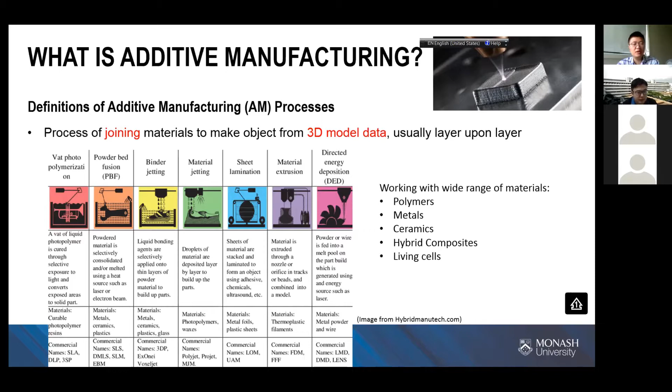Why does additive manufacturing bring us a lot of freedom? I want to emphasize two words in the definition. The first is joining. Because of this joining process, we build the part from bottom to up, so we can join material at different scales. Let me use the laser pointer on this slide.

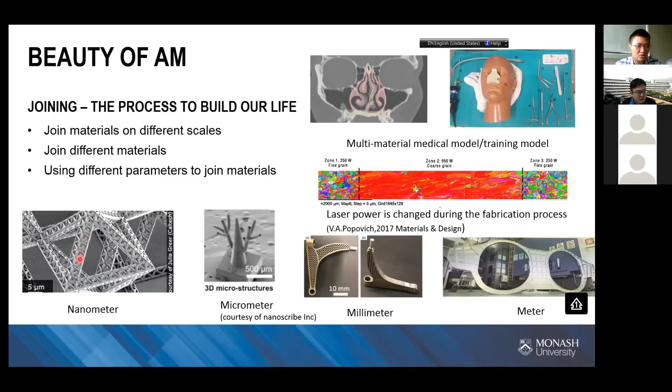If you can see here at the bottom of my slide, all these parts are fabricated by additive manufacturing, but on different scales. On the nanoscale, this is fabricated by the Nanoscribe, with the figure from Caltech. We can fabricate hierarchical lattice structures where the strut diameter is in nanometers, and each cell is about 5 microns in size.

On the micrometer scale, we can fabricate features to achieve certain surface properties. On the mesoscale or millimeter scale, we can have porous lattice structures to reduce weight. We can also fabricate parts at the meter scale, such as aircraft structure frames. By joining material, we can create different structures at different scales.

We can also combine different types of materials in one part. This is a demo from when I was studying at my university—I helped my supervisor guide an undergraduate student on their final year project to design a biomedical training model, to train medical students for nose surgery. Because the nose has different types of tissue with different elastic moduli, we used different materials in a single part to simulate the physical feeling of the medical training model. So we can join different materials.

Even with the same material, if we use different process parameters, we get different grain structures. In this example, researchers used different laser power to control the grain size. By controlling the grain size, we can achieve different mechanical properties in the fabricated material. So generally, by joining materials, additive manufacturing gives us a lot of design freedom for material process parameters.

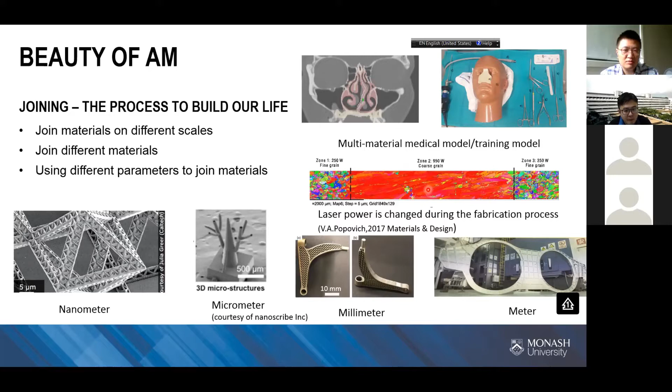Another beauty of additive manufacturing is that it can directly fabricate parts from digital or 3D model data, so it supports digital design and manufacturing. We can use CAD software to design complex structures.

For example, here are complex structures: on the micro scale, organic shapes, and on the meso scale, lattice structures. You can never imagine using conventional 2D hand drafting to draw these figures, or using conventional CNC machining or injection molding to make such complex structures. There's no way to do that.

Another thing is that only a digital model is needed. That's why additive manufacturing can respond quickly to any need. During the COVID pandemic, many countries lacked PPEs—personal protective equipment. Conventionally, we make PPEs based on injection molding, which is mass production.

But to do that, we need molds and dies first, and then we can manufacture—this takes 1 or 2 months for preparation. During the pandemic, we didn't have enough time for that. So you saw a lot of researchers and hobby makers use 3D printing to make PPEs, and it saved a lot of people's lives.

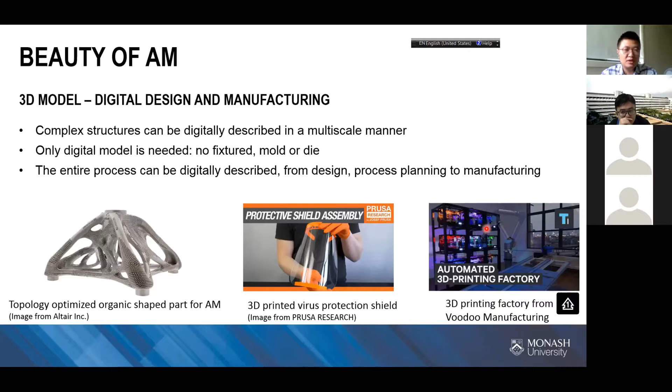In the next session, my talk will mainly focus on digital hybrid materials. Because of this beauty of additive manufacturing, we want to take use of that design freedom. One possible way is to design digital hybrid materials. So you may ask, what is a digital hybrid material?

First, we'll go to the concept of digital material, then the concept of hybrid materials. Some of you may be familiar with hybrid materials since it's a classical definition proposed by Mike Ashby: a hybrid material combines the properties of two monolithic materials, or one material and space. Technically, we have 5 different types of engineering materials: metals, polymers, elastomers, glasses, and ceramics.

We can combine any of them, and then we get a new type of material called hybrid materials. There are several types of hybrid materials.

Generally, why do we need hybrid materials? For example, we have a material with property P1 in M2, and property P2 in M1. For the hybrid material, we want to achieve material properties in between them. So we combine the materials with different microstructures, and then we can achieve different points.

Unfortunately, we cannot achieve all the points in this bounding box. We can mostly achieve along the boundary. We can only achieve points D, C, B, but ideally we want to achieve A, a material with both properties from M1 and M2. So this is the hybrid materials - almost like natural materials, which are hybrid.

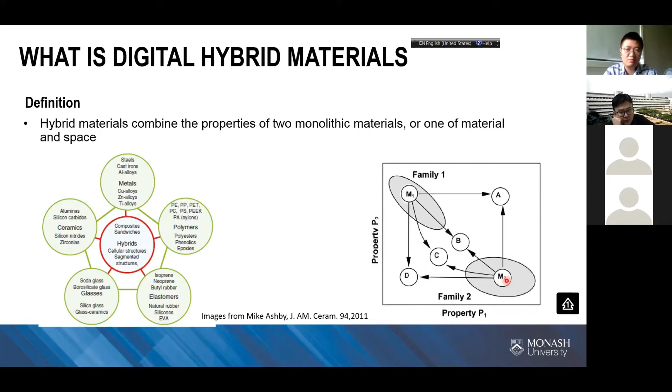The next topic is digital hybrid materials. I add the adjective 'digital' here. Why do we call it digital? Because a digital hybrid material is a type of hybrid material whose micro or mesoscale structure can be digitally designed and fabricated. Additive manufacturing is a digital manufacturing process, and it can help us digitally control the meso or microstructure of the materials.

Using computer-aided design tools, we can control the microstructure or mesostructure of digital materials. Here I show two different types of porous materials, which can be considered hybrid materials. One is metal foam, the other is an additive manufacturing fabricated lattice structure. The only difference is that in this group, we can consider it a digital material since its micro or mesoscale structures are digitally designed and fabricated.

We can control them - even though this one is randomized, like the foam structure, we can control the porosity distribution, the size of the pores, and also the strut thickness. That's the reason we call this a digital material.

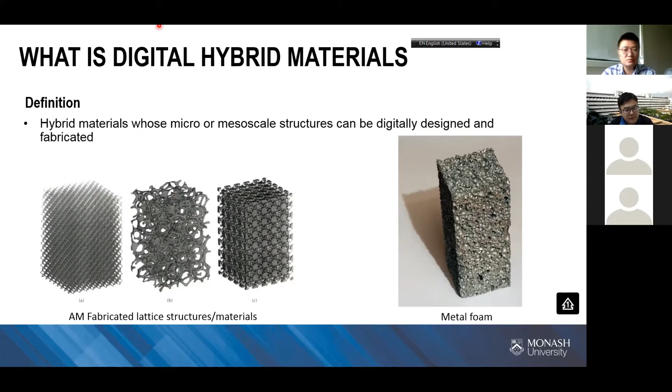In the next several slides, I'll give you some classification of existing digital materials. The first big type is called lattice or porous material. You can think of lattice or porous material as a combination of air and solid metals or polymers. According to the order of the material, we can divide them into two groups.

The ordered lattice material, where unit cells are periodically distributed in three-dimensional design space. We also have stochastic porous materials, like this type of foam, where cells are not periodically distributed - the size of the cells, the shape, and the strut diameters are randomly distributed. But we can also control the randomization, and the cell size can follow a certain probability density distribution. So this is a stochastic porous material.

For the ordered lattice material, we can also divide them into two types. One is strut-based - to describe this type of microstructure, we can use the cell topology plus strut thickness, the thickness of each strut. And also we have the surface-based TPMS, which is a gyroid lattice structure.

For this type of surface-based porous material, instead of using topology and strut thickness, we can use an implicit function, which is a surface function describing these materials, and we can define the implicit function to describe this type of material. This is about surface-based porous lattice materials.

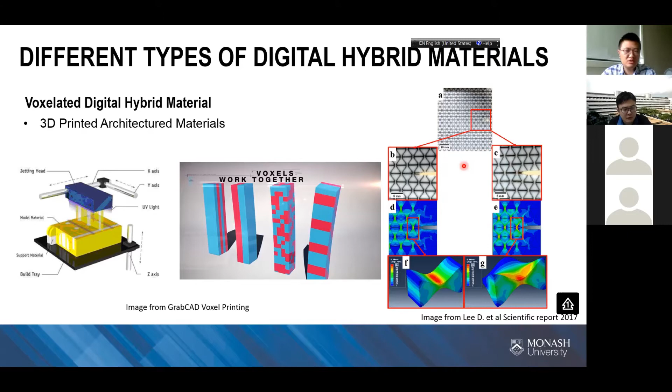Another type of digital hybrid material is a composite - a fiber reinforced composite. It's very conventional, but why do we call it digital and why do we use additive manufacturing to fabricate it? Because fiber reinforced composites have already been widely used in aerospace and other industries, but what unique properties or freedom does additive manufacturing bring us?

The first thing is that, compared to the conventional fiber reinforced composite fabrication process, additive manufacturing can help us fabricate parts with really complex shapes on a macro scale.

Second, we can control the volume fraction of the fibers, and also control the fiber orientation. Conventionally, if you're familiar with fiber reinforced composite fabrication, each layer can only have a uniform fiber orientation - 0, 90, 45 degrees. So we can only have certain angles, with all fibers oriented in certain angles, and everywhere we have the same fiber volume fraction.

But for additive manufacturing, because we have more freedom, we can digitally control the fabrication process using the toolpath. We can achieve different fiber orientations in the structures, which can further improve the mechanical performance of the designed part. I will show you another example later in my slides of how to achieve this type of design.

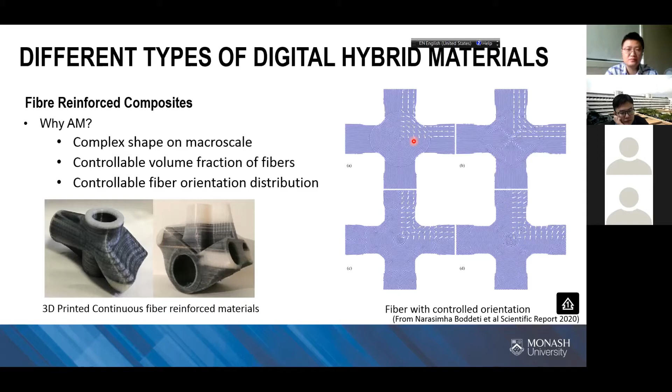The last type of digital hybrid material I call hierarchical digital hybrid material. In the past few slides, I showed you different types of digital hybrid materials, but we can combine them on different scales. This research has been done by Grace, who did a really great job trying to simulate and do the biomimetic design of the nacre, achieving this type of hierarchical structure to increase the impact resistance for digital composites and digital hybrid materials.

We can combine complexity on different scales, meaning that a digital material can be designed within another digital material. So we can have hierarchical structures. This gives us more freedom to improve or explore the properties of the designed digital materials.

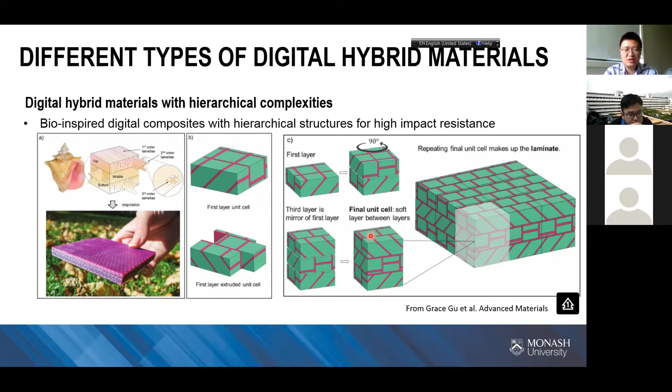So this is a quick introduction about what digital hybrid materials are and why we need them. The next part is about my research - from my PhD to my current research, trying to use computational driven methods to design digital hybrid materials fabricated by additive manufacturing processes.

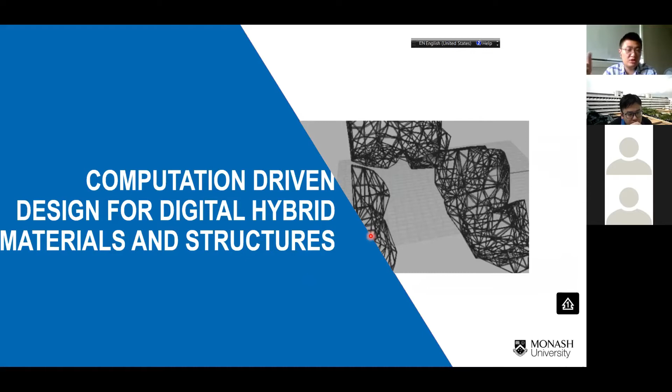First, I'll introduce you to another really important concept: what is computational design? There's no uniform definition of computational design hybrid materials - no expert has given a really strict definition of what computational design is. This definition is given by myself, from my own understanding.

In order to help you have a better understanding of what computational design is, I want to make a comparison between the conventional design method and the computational design method. Conventionally, I think most of you have experience using CAD software to design parts.

So we have the human, the operator, in front of the computer, like us today. We use the computer with some CAD software, and we use our hand to track the features, define the size, and so on. Even though we could work 24 hours a day, 7 days a week, it takes a long time to do the design, and we only have limited design options. We cannot explore all the design space.

But for computational design, instead of using our hand to track and build features, we use a design algorithm. We use parameters to drive the design algorithm, so we define the parameters with a range. For example, for lattice materials, we define the porosity or relative density to range from 0.1 to 0.5, and define the topology. We input the parameters inside the design algorithm, which can generate thousands of options automatically by itself. You don't need to use a hand to do that.

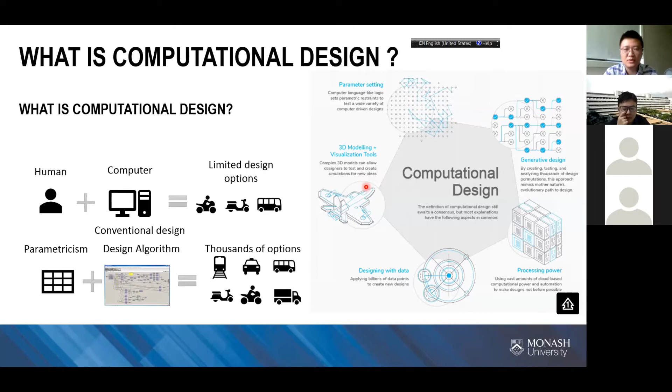So in general, the design of digital hybrid materials using a computational driven approach involves macro scale design - we not only design the macro scale shape of the product or part, but also need to consider the meso scale structures of the materials. So we have different parameters on different design scales. On the macro scale, we have the shape, and also the distribution of material properties.

Because now we can control the micro or meso scale, we can have heterogeneous materials. So in different places, we can have different properties that give us better functional performance. And on the meso or micro scale, we can control the structures.

For additive manufacturing, another beauty is that we can control the process parameters. In the past, for CNC machining or other parts, we used the same process parameters for the whole part. But for additive manufacturing, we can use one group of parameters to fabricate, for example, a thin wall, and another group of parameters to fabricate a vertical strap. So this relation is quite important.

Process parameters give you different structures. Different structures map into different properties. Different properties give you performance. We have design variables or design freedom across all those process, structure, and properties relationships, giving us much freedom at the performance level, so we can further improve the performance of our part.

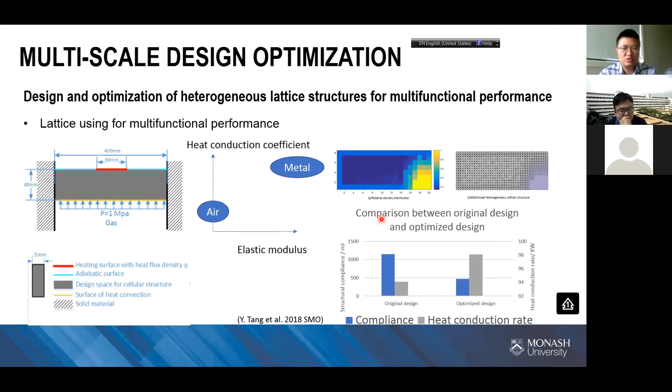It should be noted that this part also performs another function as a load-bearing structure, so we also have pressure here. In the real design, we should make a compromise between the two functions and find the optimal design that has both better structural performance and better heat conduction performance. This is the design optimization of the heterogeneous lattice structure for multifunctional performance.

Another thing is my research is not only focused on lattice structures. We are also working on composites, like continuous fiber reinforced composite. This is a collaboration project I did when I was a postdoc researcher at SUTD with Professor Narasimha, who is now a professor at Washington State University. We are working on trying to design and optimize the fiber orientation inside the part and optimize the macro shape.

You see the shape of the part changes, and the fiber orientation also changes. We use an algorithm to link those short fibers into continuous fibers. Finally, additive manufacturing using 3D printing techniques fabricates this type of composite structure, which has the fiber oriented along the principal stress directions.

So those are about optimization. Another major research area I worked on is digital modeling of hybrid materials. As I mentioned before, visualization and modeling is another challenge for hybrid materials. Existing CAD software, no matter which brand, CATIA, NX, cannot support designing digital hybrid materials. Existing CAD software cannot support modeling parts made of functionally graded digital materials, and it's also hard to simulate the functional performance of digital hybrid materials.

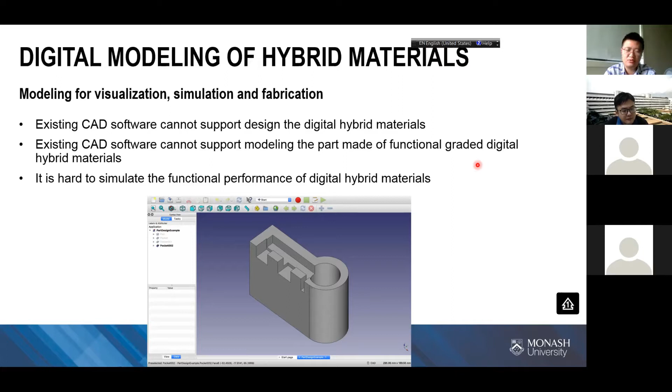So we developed a concept called the material template. The idea of this template is to use it as a standard way for us to describe different types of digital hybrid materials, ranging from lattice structures, fiber reinforced composites (short fiber, continuous fiber), and also voxelated materials.

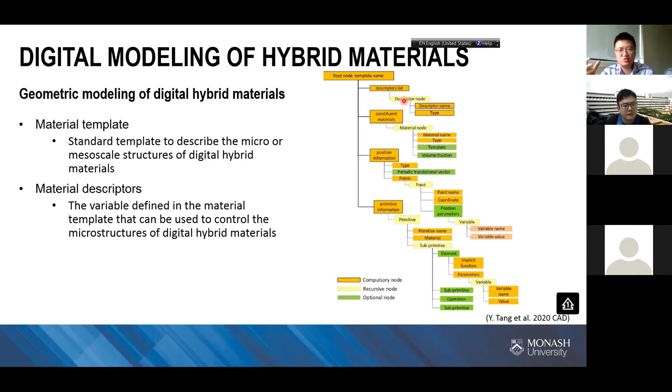This template has a node descriptor list, constituent materials, position information, and primitive information. We define the descriptors on the descriptor list, which are used to characterize the microstructure or mesoscale structure of the materials.

Here's an example of the template for lattice materials. We define the lattice unit cell inside the primitive topology as a node, and use a tree structure to describe how to construct a single unit cell. In this template we have one descriptor about strut diameter, which describes the relative density or porosity of the lattice structure. We also have another descriptor to control the cell size.

This lattice is quite easy to model because it's periodic. We also tried to model stochastic digital materials — this is a stochastic digital material we developed, made of short fibers. We can use the additive manufacturing process to precisely control the fiber lengths, diameters, and orientations.

This template is really long, so I didn't attach all the detailed information here — if you're interested, you can read my papers. In this template we have 9 descriptors total, which control the randomness of those fibers. For example, sigma theta is the standard deviation of the theta angle.

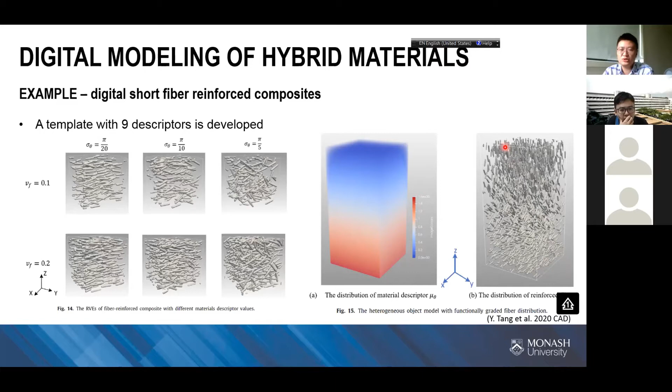Another concept is hierarchical digital hybrid composites, where we combine lattice with short fiber. So instead of the lattice thread being made of conventional metal or polymer, it's made of another digital material — short fiber reinforced composite. We can control the lattice diameter and cell size, and for each lattice thread we define its material as another digital material.

We can use short fibers and control the fiber distribution and orientation inside each lattice thread, giving us much more design freedom. Using the PolyJet printing process, we printed a functional gradient lattice-fiber hybrid digital material, and you can see that at different scales we have different meso or microstructures.

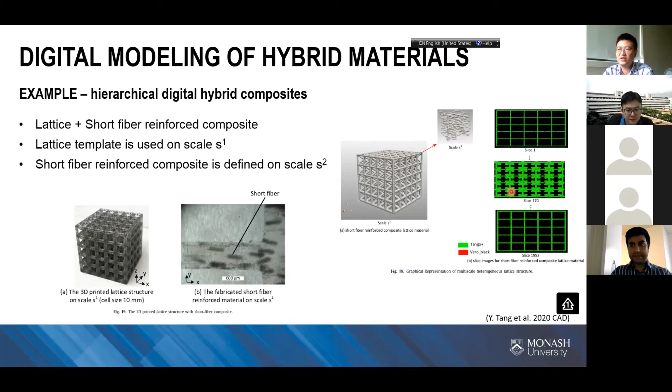This is the idea of how we do the modeling: on scale 1 we have the lattice, on scale 2 we have the fibers. We developed code in the CAD software, and at that time we built a plugin in NX which can generate a slice file. This slice file can be read directly by the additive manufacturing machine, which prints layer by layer to get the final result.

We used a different printing speed for the thread along different directions, which gives us a bigger design space and lets us further control the anisotropic material properties of these lattice structures.

We can achieve different types of lattice models in different directions, and this can further enlarge our design space and help us get a more optimal design.

If you still remember the first slide, I talked about computational design. Why can computational design give us better design results? Because it can try a lot of design options in a big design space. So if we can enlarge the design space, it can potentially help us get a better result. This is the reason why we need to consider the manufacturing process and process planning at the design stage.

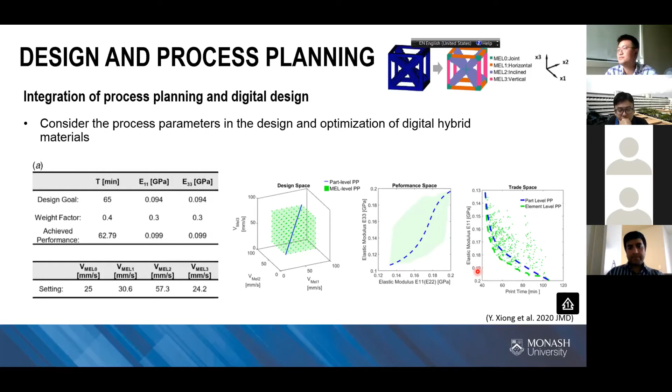In the next section, I'll give you a quick introduction about implementation and some case studies.

The first one is about IntraLattice. We actually started developing this software called IntraLattice when I started my PhD research. At that time, we couldn't find any really good commercial software, especially open software, to support lattice structure design. So we had some undergraduate students help me, and we worked together to develop this pure open source lattice design software starting from 2014.

Actually, it's a plugin in Grasshopper. It's a set of tools for lattice structure design and optimization. If you're interested in this software, you can download it freely from the website I attached. This software supports the computational design of lattice structures.

We can combine different blocks we create in IntraLattice, and this is the design algorithm to generate different types of homogeneous lattice, heterogeneous lattice, and conformal lattice.

Also we can use the software — we have the FEA interface, which can output this type of lattice directly to the FEA solver for simulation. And we have the optimization module to help you do some optimization work.

This shows how the optimization module works. This is the BESO optimization algorithm — I published my paper on this in 2014, and I implemented it in this component. We have optimizers linked to the FEA solver, which can help us further optimize, for example, the porosity or relative density distribution of the lattice structures.

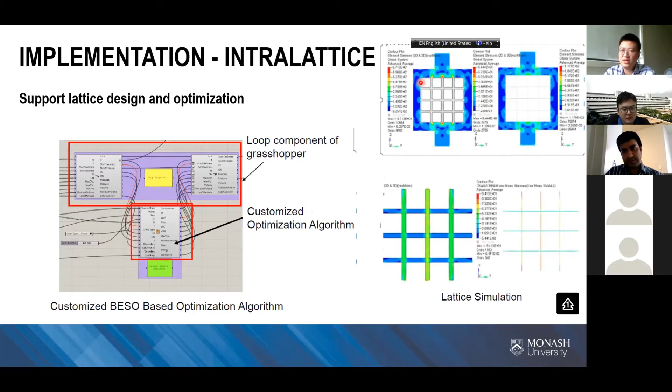We also support design for simulation of lattice-solid hybrids. This means that in your design, you don't need to have lattice everywhere — you can combine lattice and solid structures together to further improve performance.

Another software I want to mention today — you cannot download it yet because it's still an ongoing project. I talked with my previous colleagues in Singapore at SUTD, and in the United States. We think now we have software that can support the design of lattice structures.

But lattice is only one, a small type, of hybrid or digital hybrid materials. We need a design tool that can support design and modeling of multi-scale hybrid materials, digital hybrid materials, like short fiber composites, because no tool in CAD software can currently do that. So we are trying to develop, and it's now under development, tools like IntraLattice that can support design and optimization of lattice, fiber-reinforced composite, and voxelated digital composite. It's still in the developing stage.

I hope the first version can be released soon — some of my students couldn't come, which delayed our development plan, but I hope the first version can be released by the end or middle of this year.

We also welcome researchers from different fields to join us, because it's the same for the lattice software — it's not only used by people in mechanical engineering, but also by people from architecture and from biology, who use IntraLattice to design scaffolds for bio-tissue culture. We welcome researchers from different fields; we can discuss and maybe develop unique components to support design for specific fields.

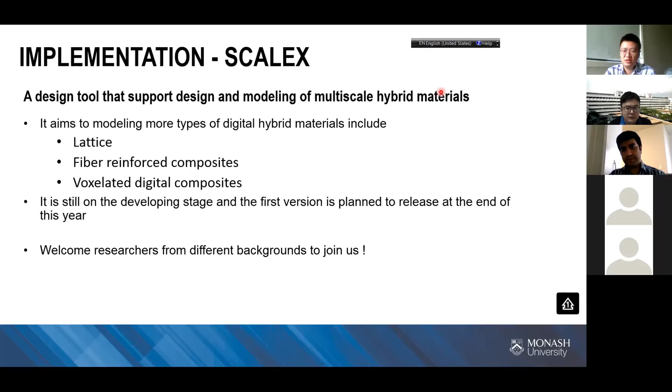Next, I can show you some design cases we've done based on our software. One is a biomedical implant. We've done many design cases with different collaborators — some hospitals, some commercial companies. We use porous lattice structures to enhance, for example, this dental implant.

We use this type of randomized lattice structure to enhance cell-bone integration and achieve a rigid connection. It's not just for structural performance, but we want to enhance the rigid connection between the implanted dental root and the jawbone.

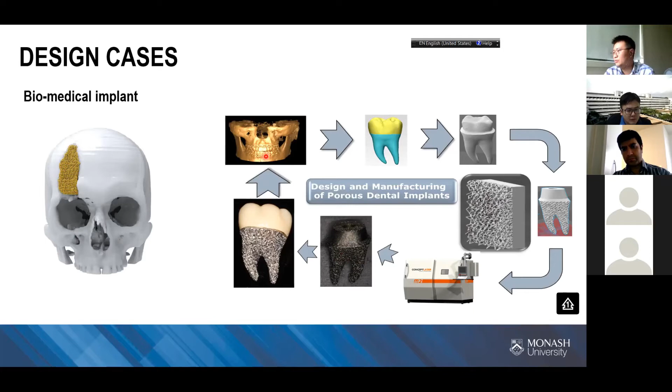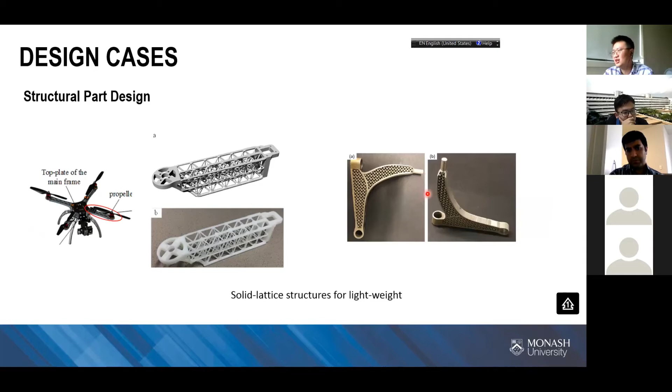This is another case study about design of lightweight structures for UAVs, unmanned aerial vehicles, and also for automobile industries, some components from cars.

The last case study I want to talk about today is design cases I did at SUTD with my collaborator Professor Zheng, who is now working in Stratasys. What we do is use voxelated material to achieve a 4D printing mechanism.

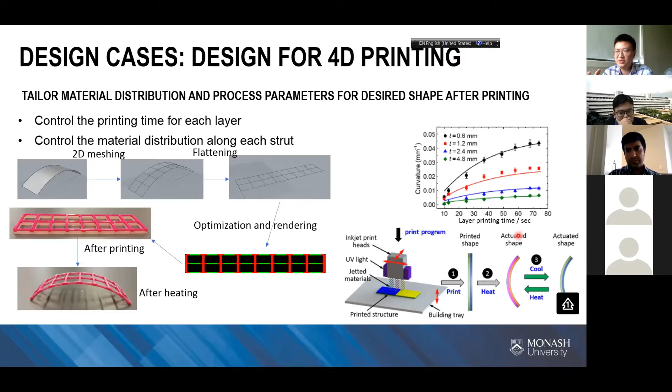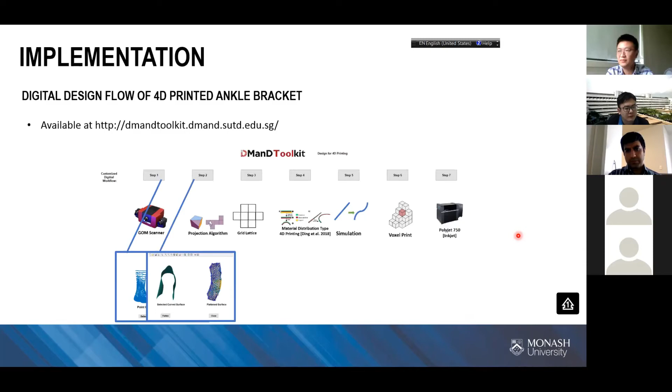At SUTD we developed this digital tool, which first supports scanning of the human ankle brace, human ankles. We get a 3D model scan, and we have software that can do the flattening. This is the flattening process. We generate the lattice and map the curvature into the material distribution for each strut.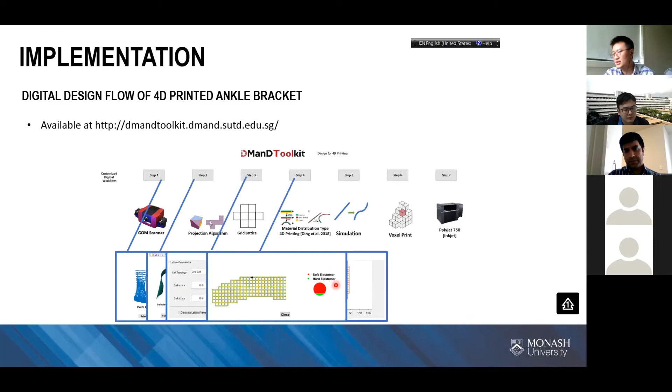For each strut, since the deformation curvature is different, we use different soft elastomer and hard elastomer. The soft elastomer is Tango, which has the radial stress, and the hard elastomer is Vero. We have different material distributions, and we also control the process parameters as mentioned.

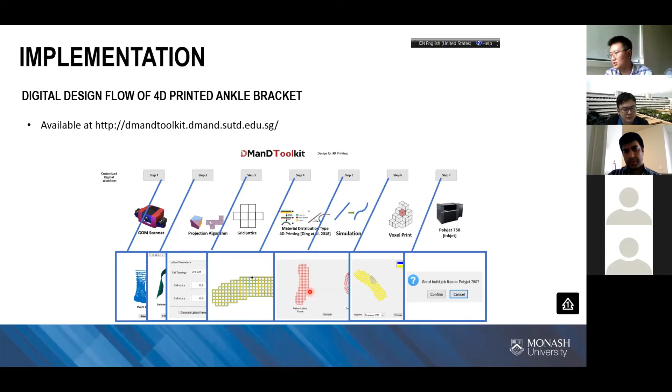We do the simulation, and if the simulation is okay, we do the voxel printing. Last, we pass our design to the PolyJet machine. This is the video.

Here. So after printing, we print the flat structure and put it in hot water, and it will deform into the shape we want.

But there are some limitations. This structure is so soft. Even though it can deform into shape, the polymer above its glass transition temperature is like rubber, so soft. It's still not functionalized. We are working on how to make it much stronger to support real function. This is only a concept in the lab.

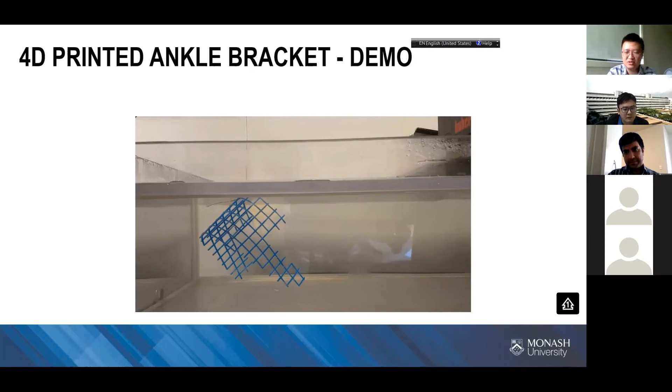At the end of my talk, I want to give a quick summary about the digital future of additive manufacturing, especially hybrid materials, digital hybrid materials. Personally, I think digitalization will be the trend for materials and structure design for AM. The concept of digital twin and digital thread can help us predict the performance of the fabricated part.

During our experiments, we found sometimes the simulation result and actual experiment result varied a lot. There are many reasons - for example, during printing the process parameters used are not as designed, and the raw materials change from batch to batch, causing a difference. The concept of digital twin and digital thread helps us update material properties and process parameters with the machine and fabrication state, giving us better prediction of performance.

Second, digital hybrid materials open a door to design materials with tailored properties, but also bring us many challenges. We cannot use conventional material selection strategies like the Ashby chart to select materials for digital hybrid materials, because we have many parameters to play with at different design scales.

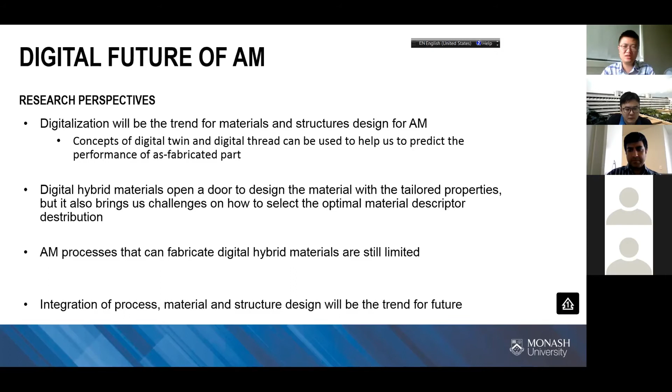At the end, I feel there will be future applications, because for digital hybrid materials, most research is still on paper, not in real applications. But I think in the future we can certainly have real applications.

For example, soft robotics - we think about using hybrid material as a smart material, as actuators for soft robotics, controlling its behavior in different temperatures and environments, and smart wearable devices.

Recently I collaborated with a professor from IIT. We are working on a special ink that can be coated on lattice designs, so we can use a lattice structure for shoe soles to absorb energy. If we put the special ink on the lattice, it can also be used as a sensor, so we integrate the structure with the sensor to monitor how you walk, how you run, and collect that data - smart structures and advanced manufacturing.

For lattice structures in the past, I did a case study with one of our industrial collaborators. We used the lattice structure for heat dissipation, for convection cooling, for injection molds, and it performed quite well. I think we can have further applications in these areas.

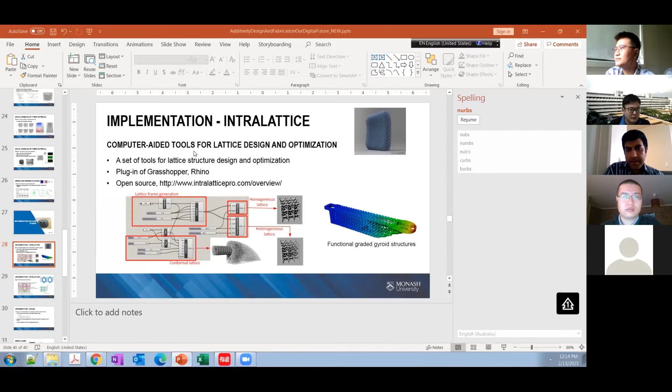So yeah, for the workflow, let me see. May I share my screen? I think I have it. Can I show my screen? Can you see my screen? Yeah, now this slide.

After you thicken the frame, you can have the thickened frame, and you can have homogeneous or heterogeneous versions. You can control the radius or thickness for each strut individually, or you can have a homogeneous lattice structure finally. So this is one flow.

But for other types of lattice structures, we have a different design flow. For more detailed information, if you're interested, you can email me and I will send you a document—we have a document on how to use the different flows.

Also another very interesting thing is that because it's open source, a lot of our users developed their own workflow based on some of our components. Before I went to SUTD Singapore, they had their customized version of the IntraLattice. Most components are from the original IntraLattice, but they built their own flow enabling design of twisted lattice structures, where the struts are no longer straight but twisted.

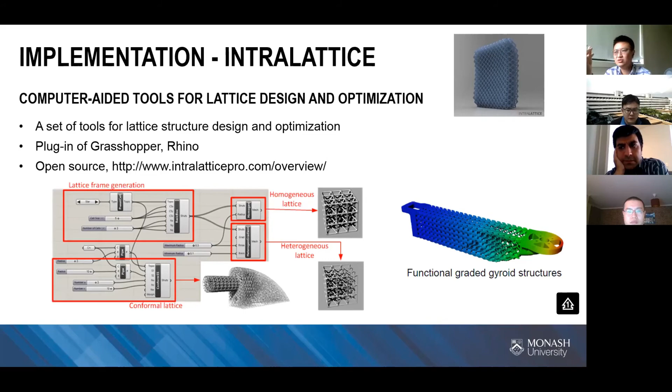So there are advantages and disadvantages. But potential research we can do is, instead of using this type of regular lattice, design some special type of lattice structure, or maybe use... I think people use this type of... wait a minute.

Yes, this Gyroid lattice structure, a surface-based lattice structure. For cooling, this may have better performance because it's much more smooth and can help avoid the problems I mentioned.

So what's the length scale of these small pores you're talking about? You can control the size depending on your applications. It can be nano scale, if you can fabricate it.

Another thing is that, as mentioned, the manufacturing process is still the constraint. From the design part, we can design even at atom scale, but for fabrication we cannot actually produce structures at that scale.

If the purpose in some applications is to suppress the turbulent motion of the coolant, maybe you can reduce the size of these pores so the length scale is very small, the Reynolds number is very low, and the flow across it will remain in the laminar regime.

I know for computing devices used for cooling, they actually avoid having small scale fins because that suppresses turbulent cooling, right? They want to have some turbulent cooling to enhance the heat transfer rate.

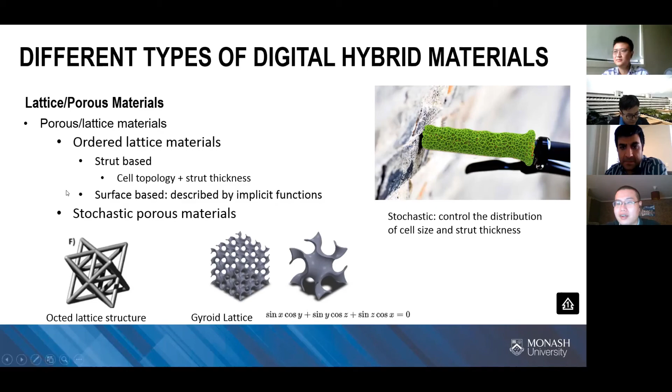If no, I can ask my questions, because I'm quite interested in the multi-scale topology optimization. I know this optimization method, but I didn't really dig into that before. So what's the resolution of this optimization method? Because I saw that you have to tessellate certain space, and then based on that as a starting point, optimize it. So I'm wondering about the resolution and the computational efficiency regarding the resolution of the optimization.

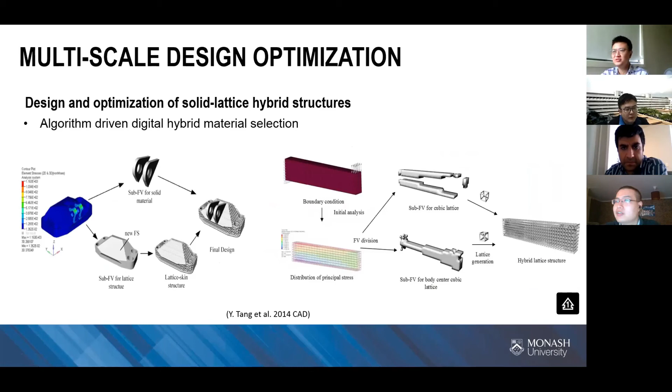Yeah, you mean this one? Yeah, I think so. This one. Yeah, so that's a good question.

To optimize the lattice, there are several different ways, and the question about resolution is really good. One way, a very simple way, is that we can take each lattice strut as a design parameter. But if you have a very large structure, you have billions of lattice struts, so you'll have billions of design variables, and it will make your optimization algorithm converge really slowly and take a long time. So what we do is we try to use topology optimization.

For topology optimization, we define the design variable inside each element. We divide the design space into several solid elements, and the size of each element is bigger than the cell size of the lattice structures. Then we do the optimization and get the optimal relative density distribution. For example, if we have millions of lattice cells, we only have thousands of elements. We use a mapping function to map the element to the cell properties, and then we get the heterogeneous lattice structure. This is the idea to make it computationally efficient.

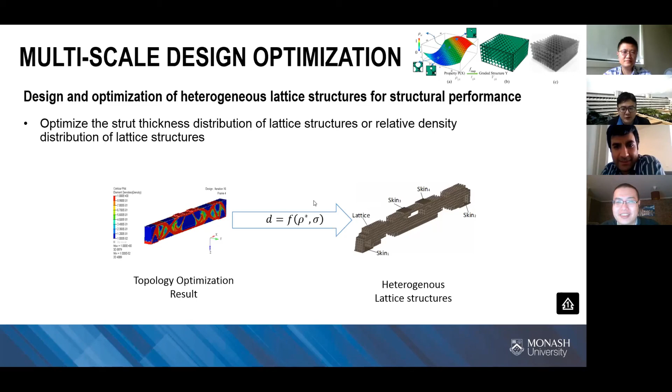Okay, yeah, I see. Yeah, that's basically my questions - two questions. Thank you. So anybody else, please raise your hand or unmute yourself, speak up.

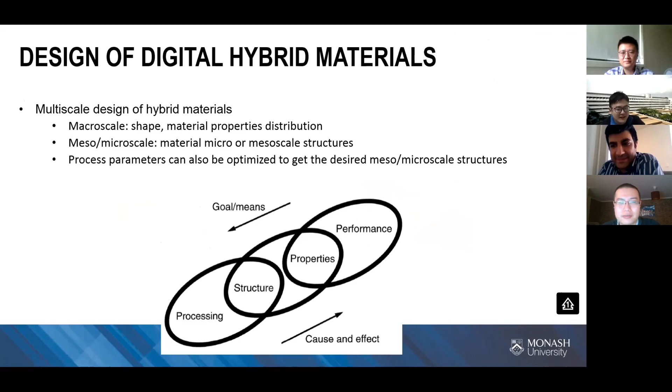Perhaps I have one more question, because in your future work you mentioned the digital twin. I know that perhaps in your shoe-making prototyping you are embedding some sensors so you can detect in real time the distribution of pressure or others, for simulation or dynamic simulation purposes. But the question is that the generative design or computational design you proposed is rather based on design constraints, which is a rule-based way. But if the simulation model is physics-based, now you have the data-driven method, which can be AI-driven. So how can you combine these, or how can you make that happen for optimizing your design in a rather data-driven manner, in real time - how can you make that happen?

Yeah, I think that's a really good question. In the past, design was one round - you design the part, you deliver it to the customer, and then it's finished. But I think you are an expert in this area. If we put a sensor on our shoe sole, we can get a more detailed distribution, because in the design we have a lot of assumptions.